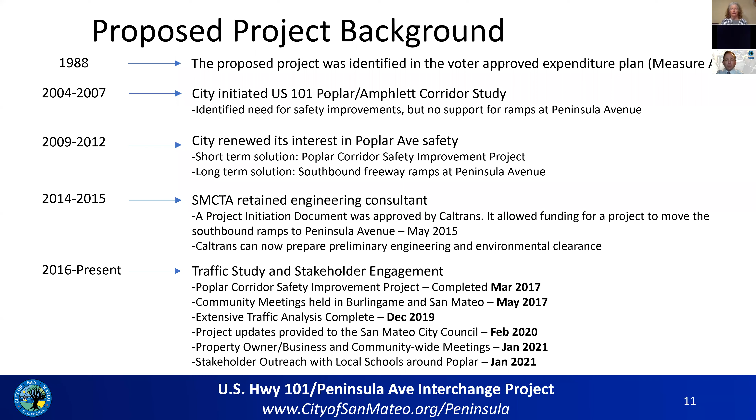We will be working on the draft environmental CEQA document. That document will have extensive public input and outreach associated with it. We will then work to move towards the final environmental document and obtain a Caltrans approval on the project.

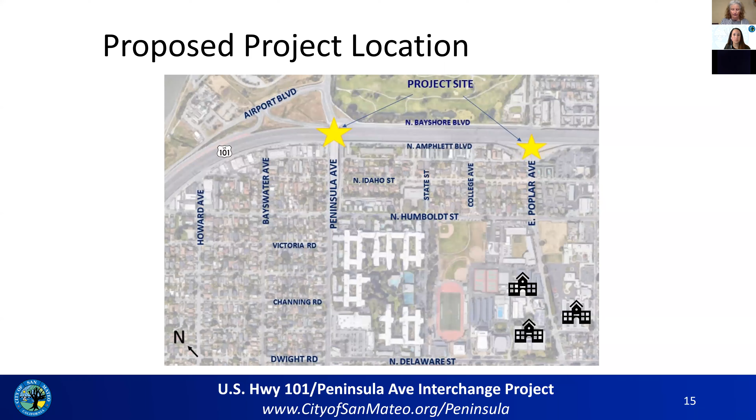So I'm going to talk a little about the Poplar Avenue ramps and some of the improvements made here. First, I want to talk about how the ramps were designed. The Peninsula project proposes to address safety concerns here because the current Poplar ramps were built in the 1950s using an older design standard. That standard has since changed, meaning the design out there now does not meet current requirements. This older design leads to vehicles exiting the freeway at higher speeds than normally expected on city streets. The current configuration also causes a lot of queuing and congestion on the city streets around the area.

So I wanted to touch briefly on some of the improvements the project made. The project included - I'll use my laser pointer here - a new median you may be familiar with between Idaho and Amphlett. There were also islands added that restricted movements from the southbound Amphlett direction, only allowing right turns here, not allowing the movement onto the freeway any longer. One question we get asked often is about this left turn lane going from the off ramps to North Amphlett, and why this was introduced.

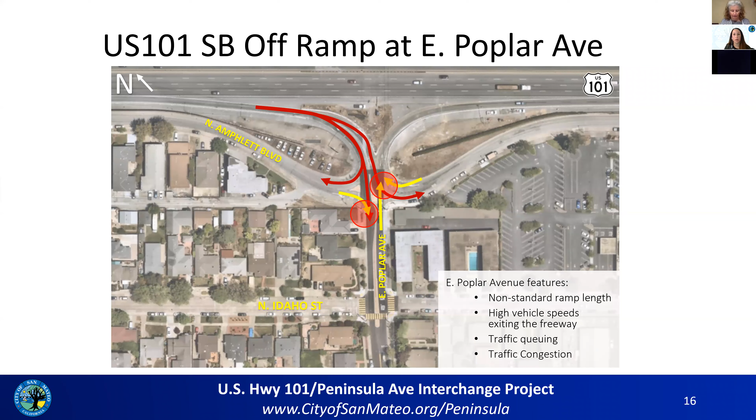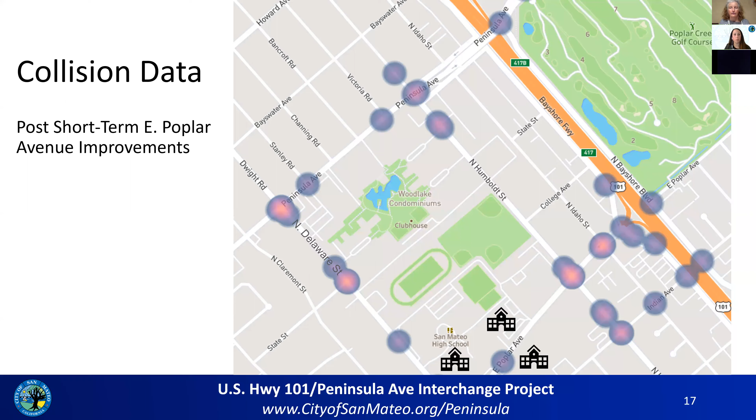This heat map represents collisions in the area after the safety project was completed and before the end of 2019, so these are pre-COVID, after the Poplar safety project. You can see some dots on the map, and where they transition to pink or brighter colors, that means a greater number of collisions at those locations. We're still seeing a high number of collisions around the Poplar ramps. Comments from last night's meeting with schools indicated there's still student-related collisions in this area, even after the Poplar safety project was completed.

So in order to address the safety issues at Poplar Avenue, Peninsula Avenue is being proposed as the new location for the southbound ramps. A few reasons include that over the Peninsula Avenue Bridge, Peninsula Avenue is generally wider with 2 lanes in each direction. It has limited driveways over the bridge, unlike Poplar Avenue, which is fronted by single and multifamily houses in the immediate vicinity of the ramps. Peninsula Avenue also provides an opportunity to implement bike facilities, which would expand east-west connectivity in this area, which isn't currently possible with the Poplar Avenue ramps. These features also mean the Peninsula Avenue ramps and bridge would be able to accommodate future traffic volumes better than Poplar would.

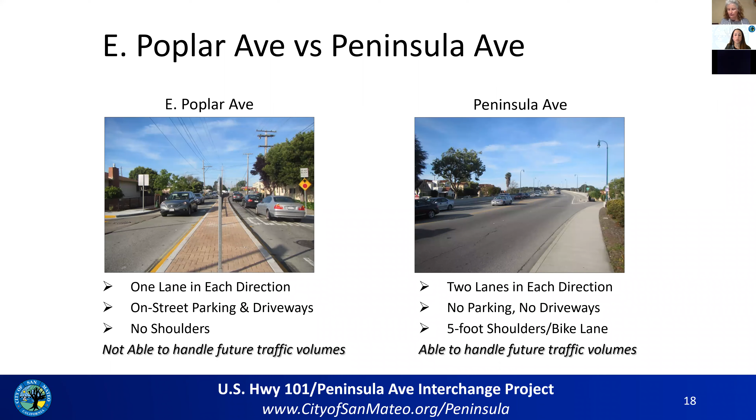As I mentioned, the Poplar ramps were constructed in the 1950s, and in the graphic below we can see that the population around that time was much different compared to the current and future population and employment values. This graphic shows a growth in population, the number of households and jobs that we can expect to see in the next 20 years, which in some cases is an increase of 35% over today's values. That's a big increase that we're expecting in this area.

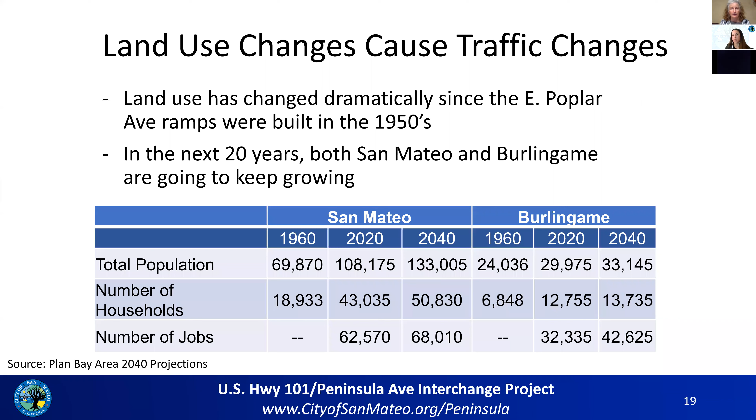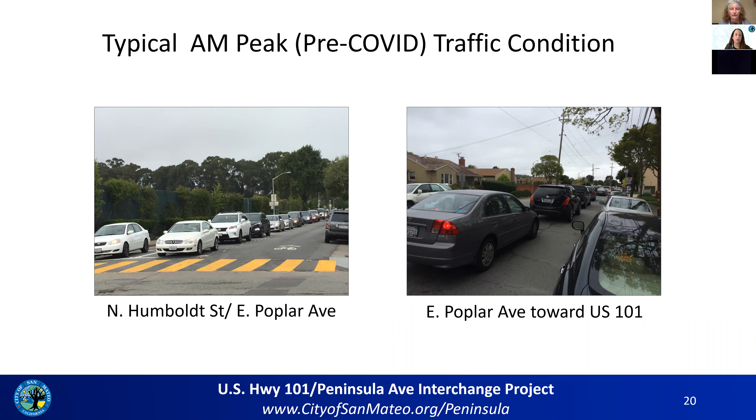This is something I think we're familiar with - this is pre-COVID in the AM peak hours. We know that this area already experiences a fairly significant amount of congestion. But in the future, we wanted to talk quickly about some of the traffic analysis we've completed, and I'll touch on these in a little more detail. When we reviewed the traffic in this area and included that growth in our traffic analysis in both population and employment - growth already approved by both the city of Burlingame and city of San Mateo - we can see that these intersections will be even more impacted than the congestion we're already familiar with before COVID.

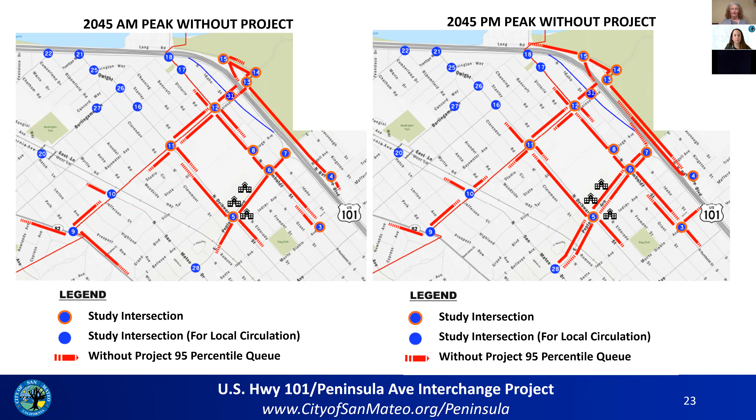As I mentioned, the Peninsula Avenue project was proposed as the long-term solution to the issues we discussed at Poplar. The safety improvement project at that location did address some of the issues, but we're still seeing the prevalence of some there, and in the future we're seeing a lot of those volume and delay issues still fronting the schools. So I'm going to go over the two alternatives we're currently reviewing before diving into the traffic analysis.

One thing to note is the location of the ramps themselves. The spread diamond really relates to the distance between the off-ramps and North Bayshore. I'll discuss that more in just a moment.

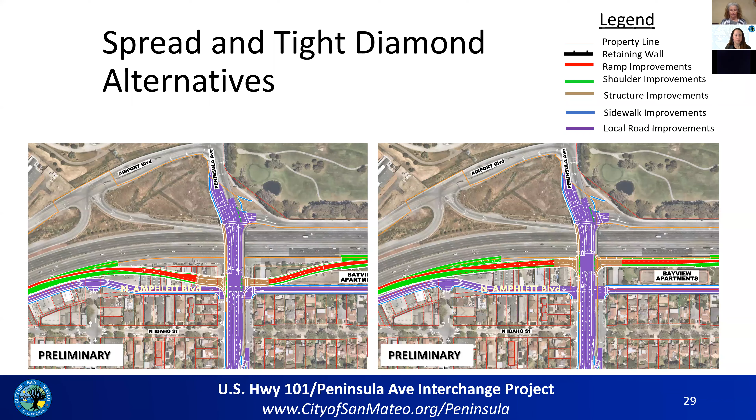You don't have to look very far for an example of a tight diamond interchange. The newly constructed Broadway Avenue interchange just north of here in Burlingame is an example, and it's actually really similar in that it has one side being the tight diamond interchange, and on the other side what we'll call a hook ramp, very similar to Peninsula.

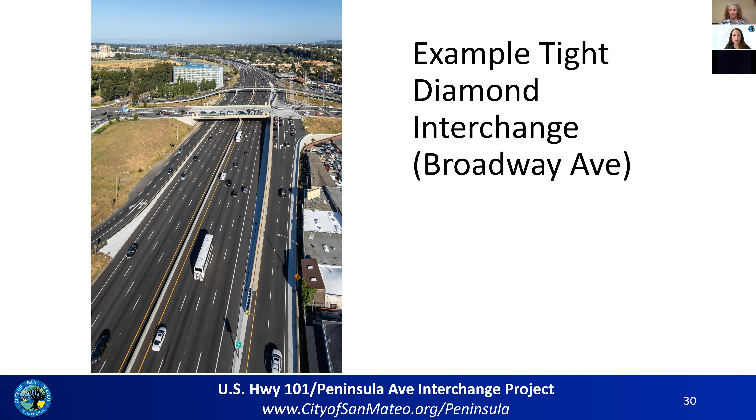From here, I'm going to move into the project traffic analysis. As Matt mentioned earlier, the project team began community outreach for this phase back in 2017. Following that outreach, the team heard a lot of concerns about how traffic would impact the area, and these next slides are really going to touch on the results of that analysis.

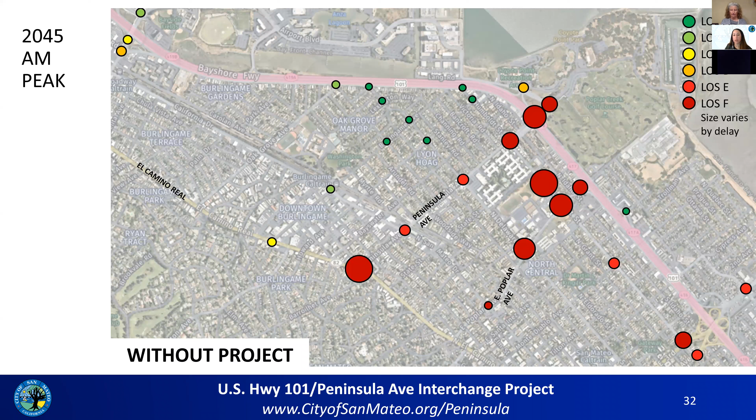This amount of delay, a level of service D, really means we expect some amount of congestion at an intersection, but it isn't standstill traffic. In this graphic, however, we can see there is a lot of LOS-F. LOS-F represents delays at signalized intersections over 80 seconds, so it's really anything beyond 80 seconds.

We have a definition for LOS-A all the way through LOS-F, but because LOS-F represents anything just greater than 80 seconds, we wanted to be able to indicate just how much greater than 80 seconds that was. So we scaled these darker red circles to indicate exactly that. Where the circles are larger, that indicates a higher amount of delay, or a worse LOS-F, if you will.

As I mentioned before, levels of service and delay are no longer things that a project would look at in an environmental analysis. The traffic analysis we would analyze now is vehicle miles traveled, and the project team will be looking at vehicle miles traveled associated with this project as we move forward in the environmental analysis.

However, we do think that levels of service and intersection delay are still important things to look at when discussing the community experience, or how the community will experience the effects of the project. They tend to reflect tangible issues like how easy it might be for someone near these intersections to get out of their driveway, or how long it might take to travel from their home to the freeway or vice versa.

This specific graphic represents level of service and delay in the morning peak hours in 2045 if we don't build the project.

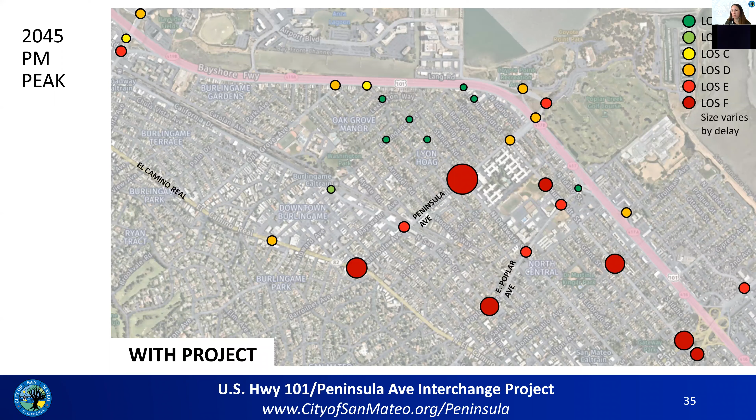As I touched on before, that time it takes to get through an intersection really correlates to traffic backup. So if it takes you a long time to get through an intersection, that likely means there was a large amount of backup at that intersection.

The intention with these next few slides isn't really to touch on the details of every single intersection, but rather to show the trend of congestion or backup in the area with and without the project. So this and the next slide show congestion or queue changes in the year 2025, which is really the earliest that we think the project could be constructed.

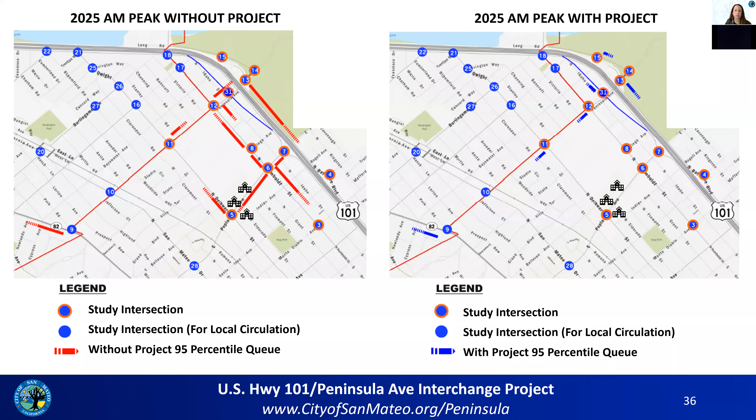In this morning peak hour graphic, we see that much of the queuing issues around the schools on Poplar decreases, and it represents an immediate benefit of the project.

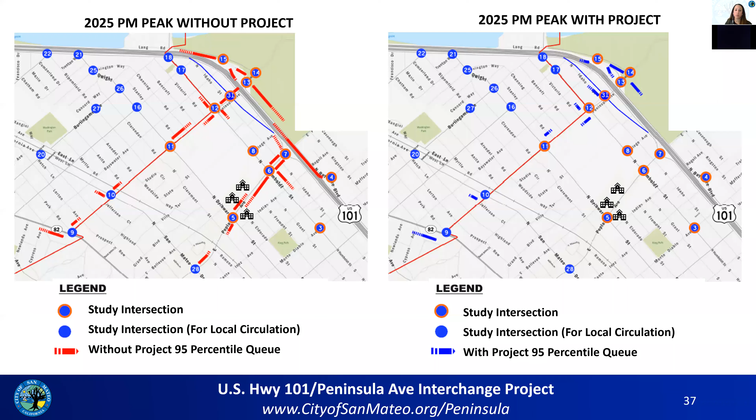Note again that the improvement is seen on both sides of the freeway, like North Bayshore, not just in the areas around Poplar.

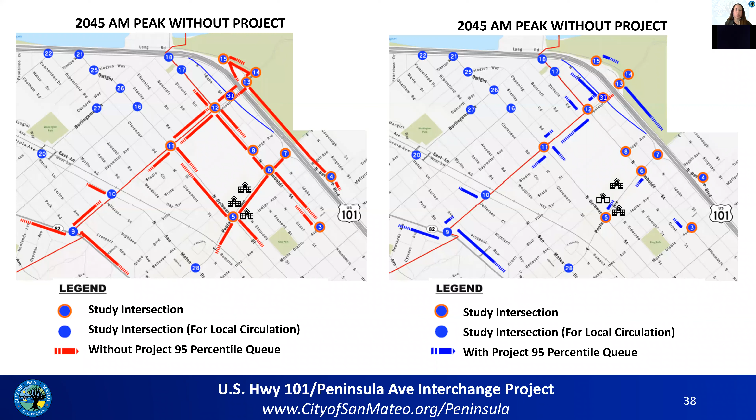And this graphic represents the peak hours, the morning peak hours in 2045. I did want to mention a quick reminder that these slides will be made available after our presentation if you want to look at any of this in more detail.

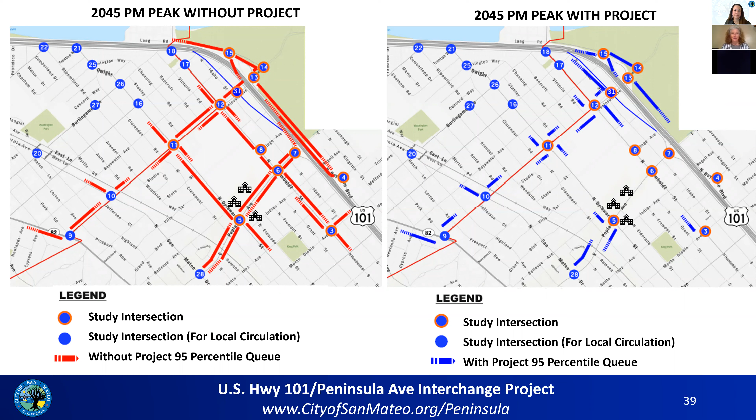So what does intersection delay and traffic queuing or this traffic backup really mean for drivers when traveling through this area? We think that it correlates directly with travel times.

In these next slides, we're going to describe a few examples of what travel times are from a few locations in the area. We can't plot every single route, but between these slides, we're hoping that we can provide a sense of how long it'll take to travel through the area with and without the project.

This particular slide demonstrates the time with and without the project in 2045 to travel from the freeway north of Peninsula to the Delaware Dwight Peninsula intersection. You can see on here the origin, which would be the location starting on the freeway, and then moving through to the Delaware Dwight Peninsula intersection.

So without the project, in the morning, it would take about 11 minutes. And with the project, it would take about 6 minutes to get to the same destination. In the afternoon, without the project, it would take 19 minutes, and with the project, it would take 7 minutes. So the project in this scenario represents a 5-minute time savings in the morning and a 12-minute time savings in the afternoon.

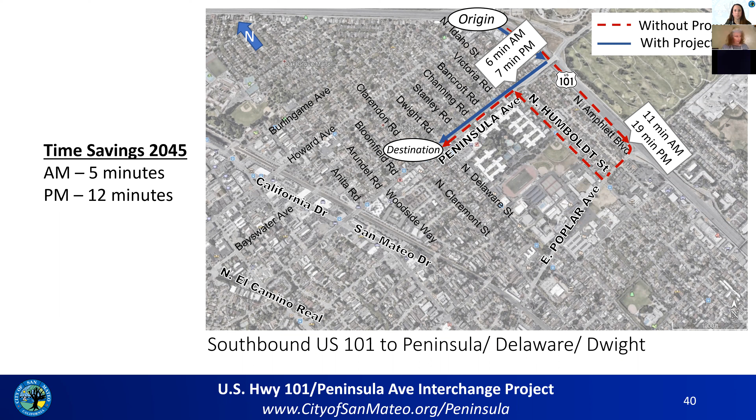This scenario represents travel time from California Drive and Peninsula to the freeway south of Poplar. Remembering the queuing we saw in this area, it lends to a substantial travel time savings of about 20 minutes in both the morning and afternoon peak times, with and without the project.

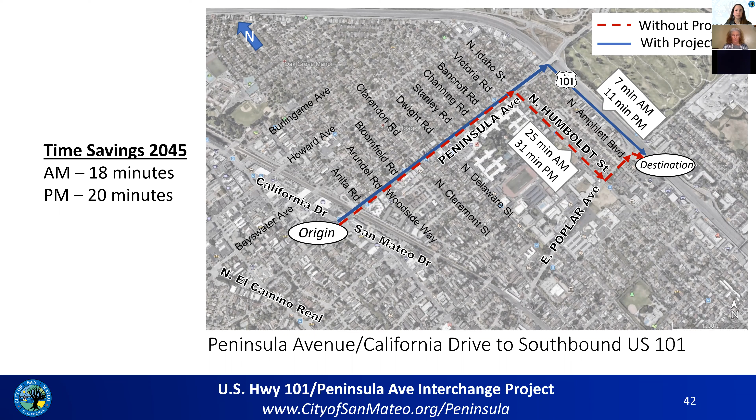In this last scenario, we're showing travel times from the Poplar and Delaware intersection traveling to the freeway just south of the current Poplar ramps. Even though the Poplar route without the project is shorter, as we saw in those traffic queuing maps, there's substantial congestion on Poplar Avenue in this area. That delay and congestion would be very extensive, whereas if the project were constructed, a lot of that congestion and backup would be alleviated. So those differences are what lend to this slight travel time improvement with the project, even though the original pathway is shorter distance and the with-project scenario would be longer distance. There's still a savings there.

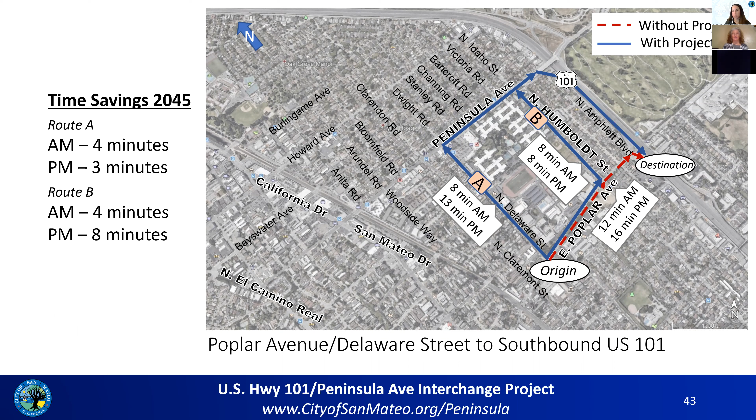We really do think the project will improve safety in this area, particularly near the schools. We also showed that many of the travel times through this area would be reduced with the project, and in general, the traffic operations in the area would improve. Lastly, it's expected that the project will be able to handle improved growth better than the existing ramps.

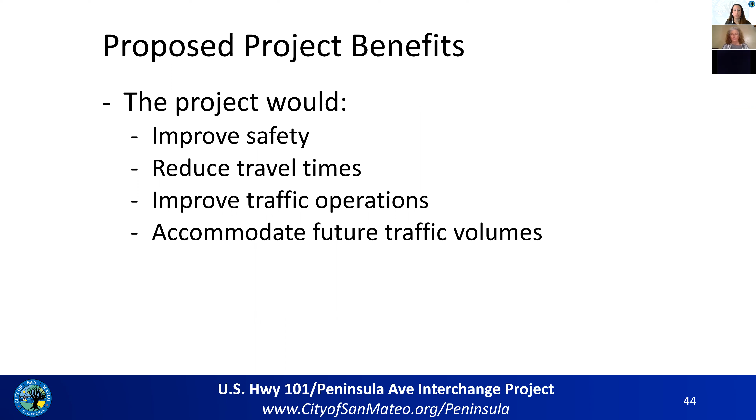So I'm going to move on to a little bit of what the project itself would look like.

We're going to take a look at a quick cross section of the overpass. You'll note where the letters AA are, and I'll point them out. From here, we're going to look at a cross section looking west, this way. We can see that the overpass is going to be widened slightly from today's configuration to accommodate turn lanes onto the freeway. You can see that right turn lane here, going towards the freeway. We expect to see separated bike facilities as well on either side of the roadway.

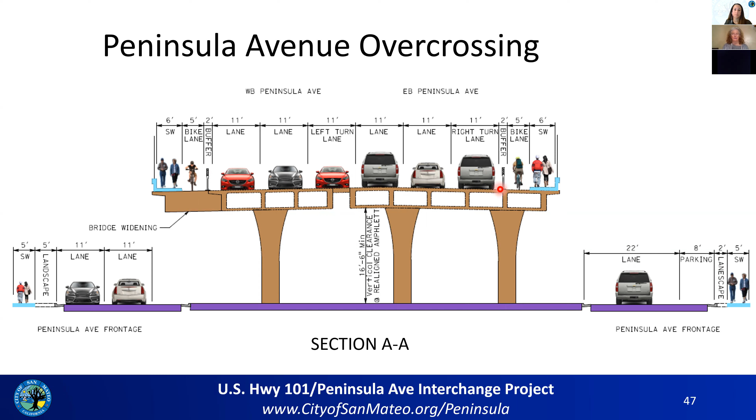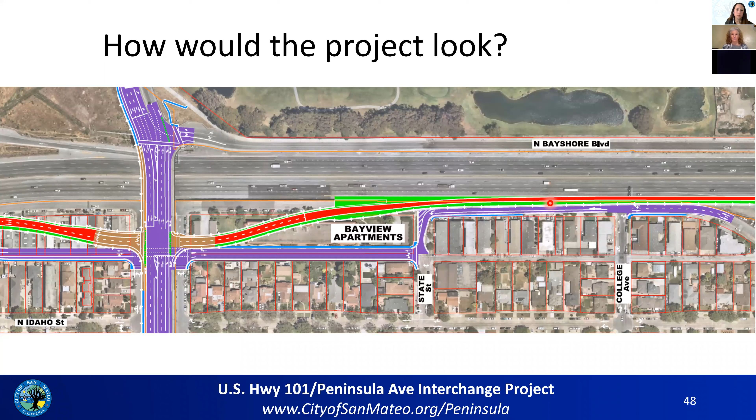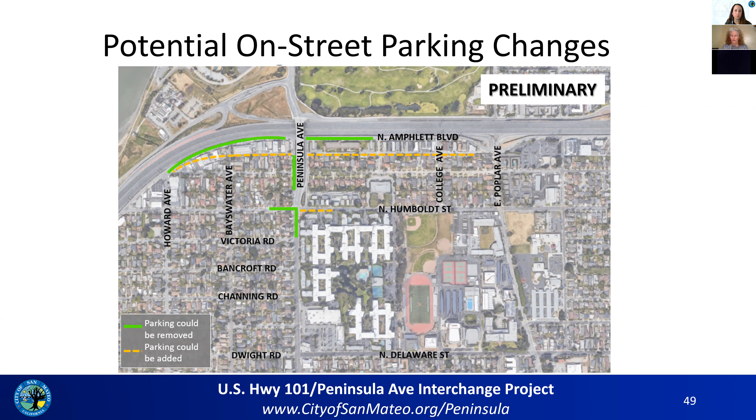So from here, I'm going to turn it back over to Matt to wrap it up. Thanks, Bethany. So let's talk a little bit about the next steps in the process.

Moving the project forward, who's part of the project team, and how is this decision going to be made? The city of San Mateo, as project sponsor, will be leading the analysis and evaluating the alternatives, working with Caltrans and selecting the preferred alternative. That'll come out as we go through the environmental phase and the CEQA phase this year. The TA, as a funding source, would approve the project as part of their long-term planning efforts for fund allocation. So those are the three entities involved in moving the project forward and selecting alternatives.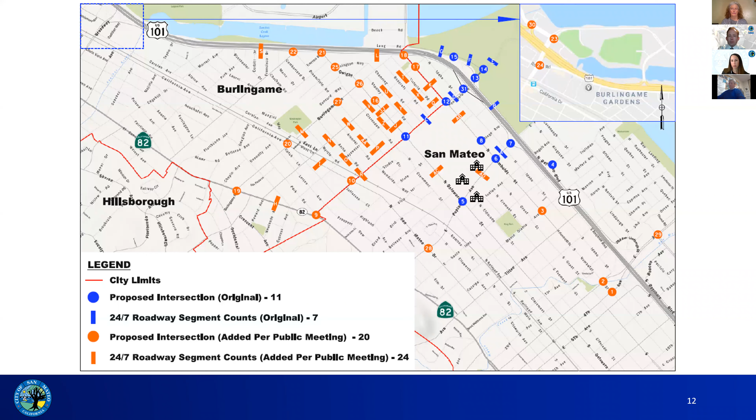And where will they be able to find that information? Again, during the environmental analysis, we're going to be having that scoping meeting this spring. We'll be introducing the project then, and those comments and the analysis itself will be made available for public review and comment. Okay, William Bratton, followed by Cynthia Newton.

Do you hear me now? Yes, we do. Thank you. Thank you. My question is, seeing the proposal tonight, is the interchange, I guess you're calling it the,

whatever, the interchange that takes out most of the property, is that the only one that's being considered at this time? Matt has two different options, so I'm not quite sure which one you were referring to. The one that takes out the apartment building and all the businesses along Amphlett.

No, so that's the one you're moving forward with? Both options are still on the table for review. So we presented both of those tonight. Both of them do involve the properties identified on the north side of Peninsula. Only one of the two options involves the property on the south side.

Okay. Are you still open to other suggestions? We've done a pretty exhaustive analysis so far during the 2 phases of work that we've undertaken with the consultants that have been hired. So I think there have been other options that have been looked at. I can't say that everything's off the table, but there's been a pretty thorough screening process over the course of the years that this project has been evaluated. So I would be surprised if something came up that was cost effective and could be built with the constraints that we have. But I mean, never say never.

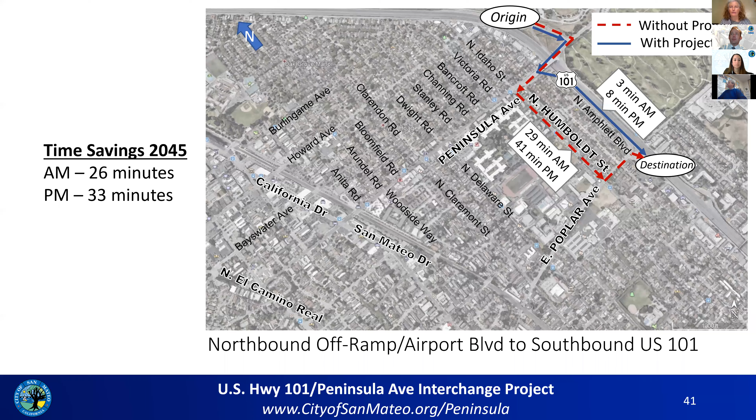The big question is another option that has been brought up before, but I'll bring it up again: put the on and off ramp on the freeway side of the sound wall. I think that would actually reduce the overall cost. There would not be any eminent domain, and as Lynn mentioned, she counted 25 properties at an average figure of $1 million each. That's $25 million that would be saved just by moving the on and off ramp to the freeway side of the sound wall. Another issue that would be saved is that Amphlett can be left alone, it'll be straight through, they don't have to make the jog. You don't have to widen the two alleyways on the north and south side of Peninsula, and the semis would not have to navigate through tight 90-degree turns through a widened alley.

The other issue or question is, since the old drive-in is scheduled to open soon, the last plans I saw were either 3,500 or 3,000 offices. Just take half, they'll go north, the other half will want to go south on 101. They will impact the traffic delays on Peninsula to get to the on-ramp to 101. Did your studies for your LOS grading from A through F include the impact of possibly 1,500 new vehicles?

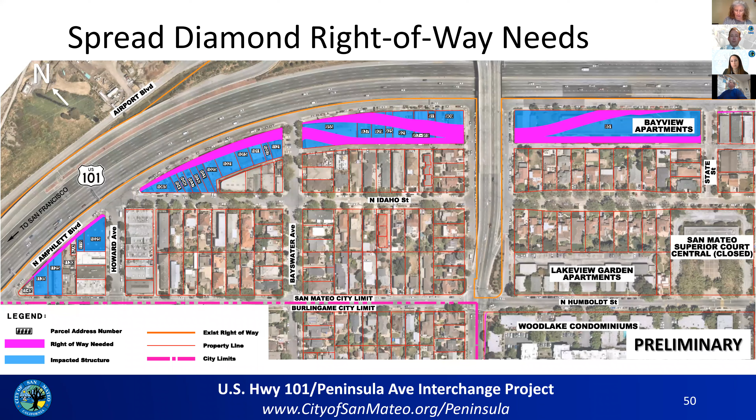In regards to the driveways, I really appreciate what the previous speaker just said, because the driveways, not only are they all along Poplar, they're all along Peninsula. They're in the back alley behind North Idaho Street, where you're planning on putting an access road. There's a lot of driveways that are going to be impacted by this project that aren't being considered.

And as a newer homeowner in the area, I guess I would love to see the previous plans that have been considered in regards to where these ramps could be located, because it feels like there are locations that wouldn't impact property owners and residential locations in the way that these plans are currently impacting them.

And lastly, you've talked about meetings with homeowners. You've talked about meetings with homeowners that have the properties that'll be affected by eminent domain, properties in Lyon-Hoag.

But I have a property that's going to directly back up to this access road that you're planning, and nobody's reached out to us to have a meeting about how this is going to impact us. And I'd like to know if that's planned to happen.

Okay, so I heard three things with two questions. One is the comment that there are a lot of driveways. Two, you had a question about how to access those previous plans. And you wanted to know if there would be a meeting for people impacted by the new traffic circulation and the use of the alley. So Bethany, I'm gonna throw both of those two questions to you about where to access previous plans, and also about the community feedback on the alley.

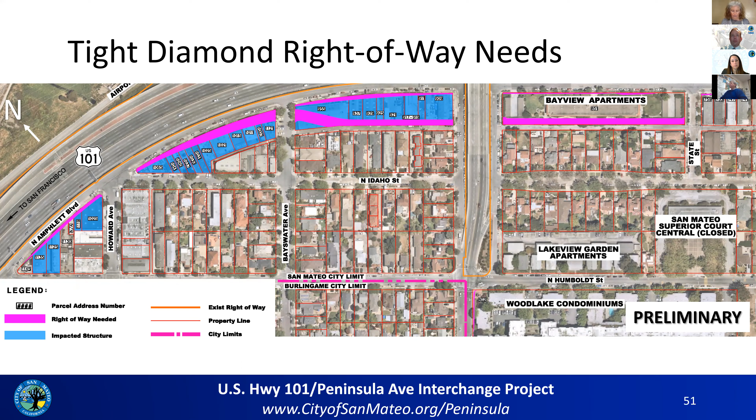I don't think whoever is designing this has taken into account that in order to widen that alley into a 2-lane road, you would need to take all of the parking structures that go with the apartment building there at Bayview Apartments. So you would actually be reducing parking, and not by just a little bit. Somebody needs to account for the fact that you're taking out parking structures for that apartment building. And as Janelle said, almost all the houses on that block have rear facing driveways, so I don't see how you could possibly be adding parking in that area with that tight diamond plan.

Sure, I can touch on that for a second. The intention is for that roadway to be widened to a full standard roadway. Right now that's an alleyway, and in that alley parking wouldn't be allowed. By widening it to a full roadway, we would allow both two-way traffic and parking along that street.

In addition, we are aware that there's driveways and rear access to a lot of the properties, and all of those would be taken into account when we do the design. We would definitely be maintaining that access to the rear of those properties along this new Amphlett Boulevard. And yes, we're aware of the impacts to the apartment building's parking there. We do think we'll be able to provide that parking on street where it does not currently exist.

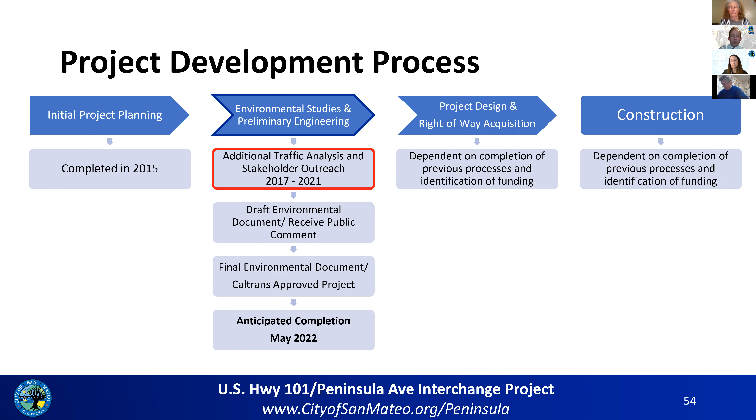Thanks, Bethany. This is the anticipated completion. We're coming back out and re-engaging after the traffic analysis, which was the main comment and request that we address and analyze further. Now we're getting to all the other aspects of what's normally involved in a CEQA document that had been put on the back burner pending completion of the traffic analysis. It's not typical for a project of this nature to have done this type of traffic analysis in advance of the CEQA evaluation, in advance of the project scoping meeting. Normally this is done later in the process. So we've spent a good amount of effort to get as much of the traffic concerns out there and into the public, so people can understand both the benefit and the impact, and be able to enter into the CEQA process informed. That is something unusual about this project, and the timing will be towards the end of this year or beginning of next year-ish.

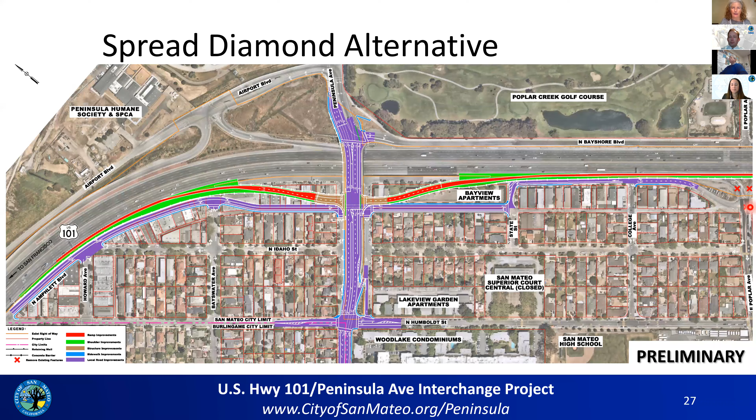But at the Poplar intersection, it would go straight through now, correct? Yes, sorry to not answer that part of it, but yes, that's correct. Thank you. And Bethany, can you just be clear for some of the audience? I don't want people to make assumptions because you showed the spread diamond that that's necessarily what you're building. So if you have the opportunity to show the tight diamond, do that as well.

Yes, absolutely. So these two alternatives are very similar. The realignment of Amphlett Boulevard would actually be in the same location. It would still provide this access below Peninsula Avenue, and this would operate much in the same way that the spread diamond was. And yes, that access would be provided at Poplar to go through at that point.

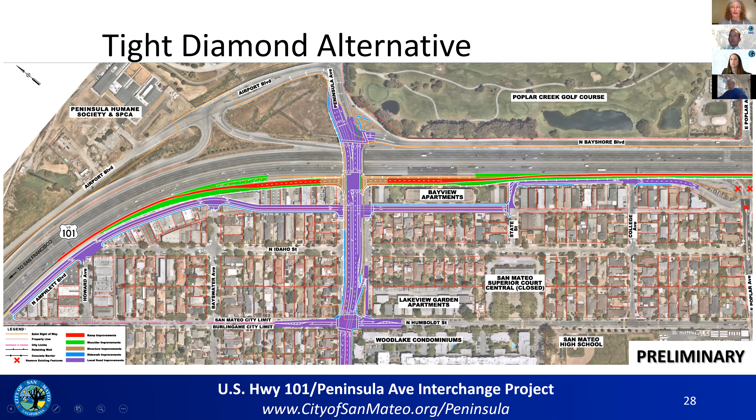Thanks, Bethany. Okay, Lori Watanuki, you have the floor, but it looks like you are muted. Now you're open. Thank you. Am I open now? You are. Lori Watanuki, I'm a board member of Central Neighborhood Association, and we adjoin the North Central area.

And my concern was what Seema just... Lori, we're losing you. We can't hear you, Lori. Is there another place in your home that you can go with better cell reception? We can't hear anything.

So while we're doing this, I am going to ping our project team to see if anybody was able to do the research about our Caltrain question in the general plan. So do we have an answer on that? I'm asking the project team to give me an indication on whether or not we have an update, or whether that will be strictly a frequently asked question answer. Were you able to look at the general plan for Burlingame and suss out whether the Caltrain electrification and/or the Burlingame grade separation at Broadway is actually in the approved part of the document?

So it looks like we lost Lori. I am going once, going twice on the feedback from the project team. Ramesh, Ravi? That's it, yeah. Hold up. Yeah, this is Ramesh.